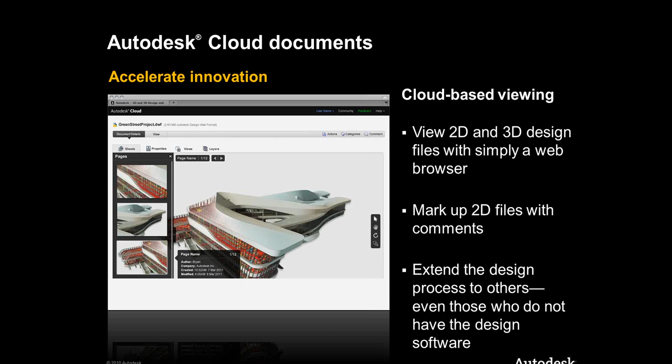While there is not a Revit editor, I can actually upload Revit files, and by doing that I'll have the ability to view the information in them. It does take a little while for it to parse on their side so I can visualize the information, but you can actually look inside the views that were already created in that model.

Now, if you're looking to take advantage of this, the website's right up there: documents.cloud.autodesk.com. That'll give you the main login so you can take a look at that.

Now, I am going to hop into this, but I'm going to hop into it after I go over Buzzsaw.

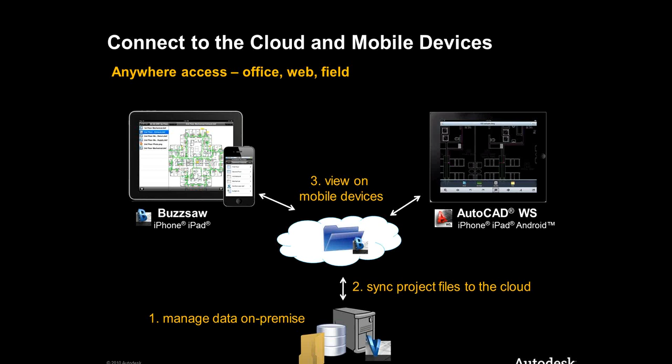So Buzzsaw, again, works for iOS. So if you're running it from the iPad or the iPhone or the iPod, same thing - you can download it for those and run that. And many of the other ones also work for Android. So if you're looking at how you can actually coordinate this, not a problem.

Navisworks can actually aggregate files from Vault. Vault is another program that Autodesk has that helps you synchronize and back up content. Everything you're doing back and forth to Buzzsaw can get pushed out to Vault. And then Navisworks, also Revit - I'm going to show that too - can actually pull that data from Vault so I can get the information I need.

So you're having everybody do their work locally, just like they already are, but I can have things automatically pushing that content to the networks, to the cloud. That way it's accessible by everybody, and it's not the kind of thing where we only update our files once a week and then find out there's been a change four days later. We can actually see what's happening almost automatically.

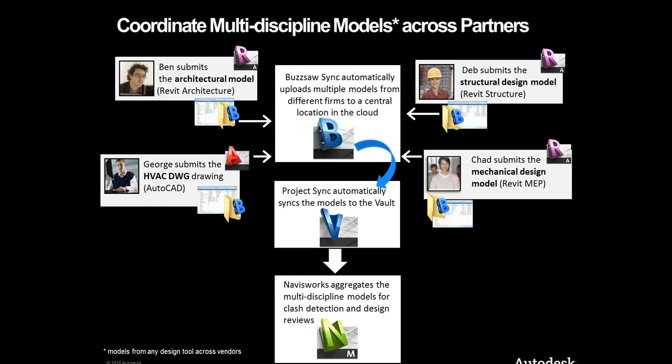So the mobile apps they're pushing - BIM this last year or so has been really, really being pushed mostly by the construction industry. Because of this, Autodesk understands that they need to have access to this software, and more so to the data. They're not always going to be able to walk around carrying a desktop and a monitor or a really beefy laptop. Sometimes all they actually need is some information.

So what they're actually making sure you can do is access all of this data, or at least as much as you can right now, through a smaller tablet - whether it's a Toughbook tablet, so if you drop it off the high-rise it'll still probably survive, or just a simple iPad or Android you can hop on, look at, and explain to your subs what you're trying to show or what's supposed to happen. Many companies, including Skanska, are actually pushing out tablets to their sites, and it helps coordinate and communicate the actual design intent.

So I'm actually going to hop over to the software for a second, to Revit. I'm just in a Revit file that was created in the class. A little cheesy, has a couple of little issues in terms of the roof, but so be it.

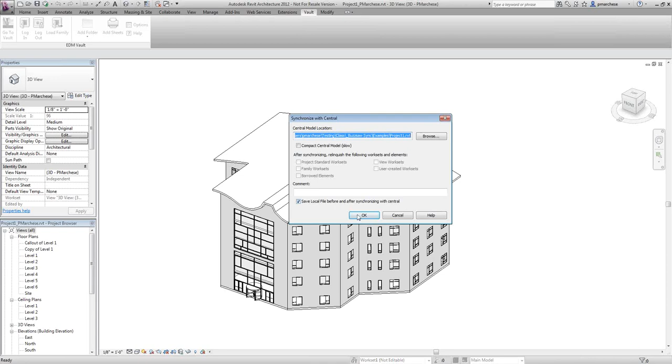Now, inside the Revit file, typically what will happen is you'll save your file locally, and you might get a pop-up depending on what you've got plugged in. I can also save this file to the central, and this will ask me what information is going on with that. Now, if I'm just coordinating with my team locally, no big deal. However, I got this little pop-up in the bottom corner here.

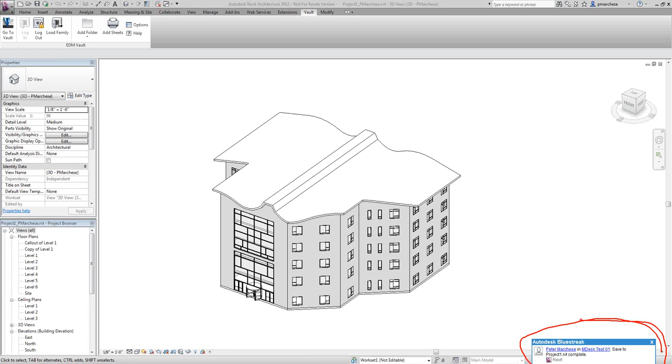That pop-up is a program called Autodesk Bluestreak. I'm going to go into this a little bit more, but that pop-up is basically letting me know, and also letting anyone else on the project team know, that I just saved my work to the network. So things have been changed, things have been updated.

Now, if I want to make sure that my content here is coordinated across everybody on the team, there's a few things that I can actually do. By me saving here, that saves my file to the network. But what I also have is my Autodesk Buzzsaw sync.

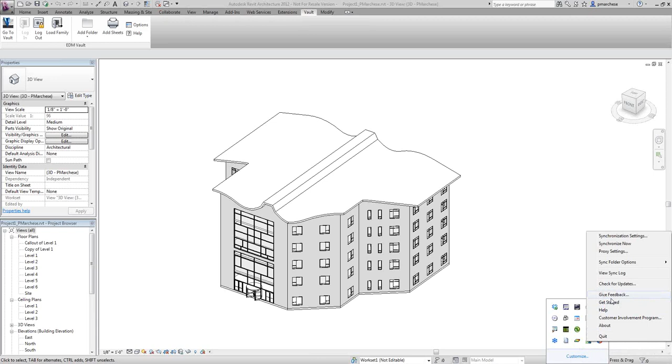What this allows me to do is either say specific folders or files that I want this to be synchronized across the web. I want this to get pushed to the Autodesk Buzzsaw service. And I can tell this to sync on demand, when things are updated, or all the time. So currently, for this project, I have told the folder that it's a part of to be synced manually.

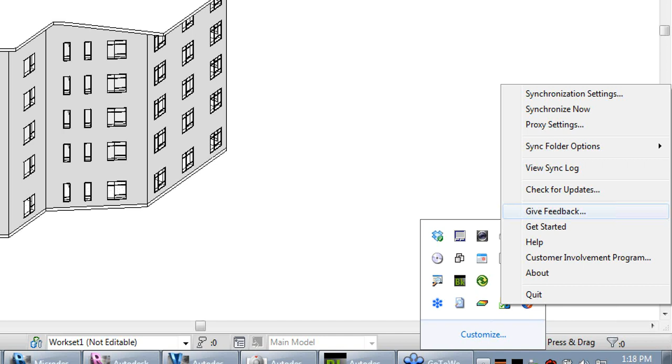And it's really as easy as right-clicking on a folder and saying, set up for Buzzsaw. So if this is something that I really wanted to do, I would just go here and right-click on it. Once that flyout comes out... there we go. Add to Autodesk Buzzsaw sync folder.

So that's really it. It's not like you have to go through a large amount of setup. Once I do that, it just asks me to log in, so it understands which Buzzsaw sync folder you're putting in, tells it where to actually store it, and you're good. And then it'll actually sync the content in there to a network.

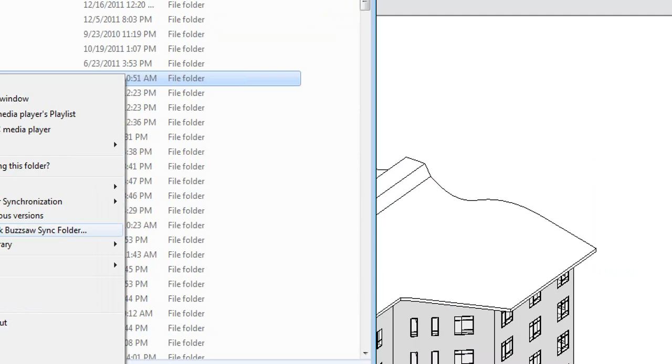There we go. Now, that's the Buzzsaw side of the equation. That's sort of like the cloud storage. Another way for me to do this is to use something up here called Vault. Now, what Vault does is it does tie into Buzzsaw. The two of them sort of work hand in hand for coordinating and also controlling content.

What I have here is an add-on for Revit, and this allows me to log in and either load families from Vault. So let's say you're trying to coordinate 3 offices worth of Revit content. If somebody updates it here, I want it to be updated over there. I want everyone to be working off of the same thing.

What I could actually have is a Vault server running in each of my offices that are collaborating and coordinating with each other. This makes it so that when I actually do load content from my Vault, it's my office standards, and it's the same office standards that are available across all the places.

And I can also say this: I want to add a folder, files or a single file. Similar to the Buzzsaw that I just mentioned, where I right-click and say add this to that, I can add a folder that will be added to and updated to Vault. What that means is that when I go to Vault, it'll automatically say, okay, this is being stored. This is being backed up and archived. In some cases, it's similar to what Newforma does, if you're familiar with that.

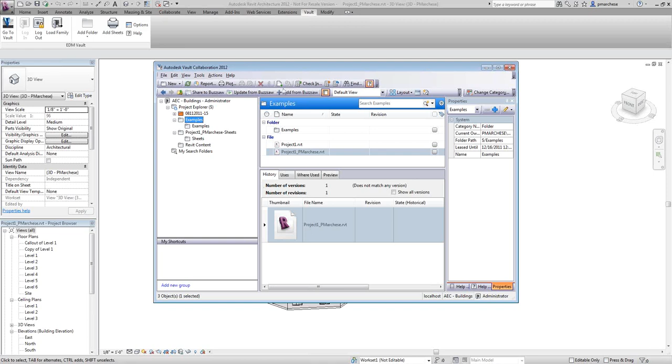If I go out to here, what I'm looking at is my administration console for Buzzsaw. This is the only thing that's really installed locally. This allows me to see what projects I'm working on, so I can manage my projects, see who's actually working on them, what files are in them, and what the actual timeline or actions being placed are. So I can manage a good amount of information here.

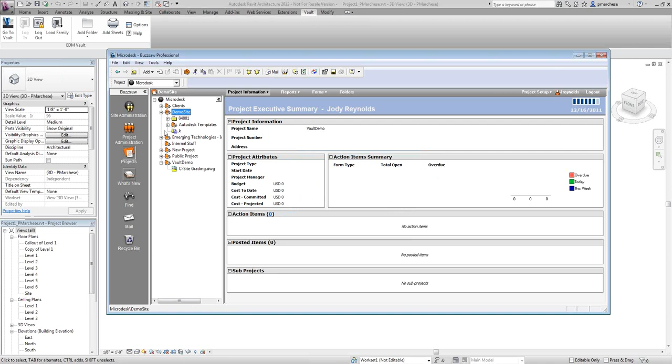So I can see the different folders and the different information going on in there. I can actually see who has access to what. So if I'm an administrator, I can see what's happening with things, and take advantage and understand the permissions and attributes of everything. But this is something I work on locally, because once I've done that, it actually goes out to the web, and then I manage it through this.

Buzzsaw itself is web-based. Vault is something I'll access through the internet, but it's actually something I still have to manage on my own servers. Buzzsaw, I don't.

So this currently is showing me my different projects that I've got on there. It shows me the last modified date, sizes if I ask for it, and the owners. In here I can start looking at the different files, the different projects, and actually see what's happening inside of here.

If I click on one of my files, I can come in here and it'll tell me when it was last updated. I can click on versions and see how many versions of this file I currently have. And this is all cloud-based - anybody with a phone, anything, could log into this and start seeing this data.

And if I want to, I can manually upload this. Or again, what I could always do is just use that Buzzsaw sync tool to do this on my own, so I don't have to tell it to push that out. I'm ready for everyone else to see this.

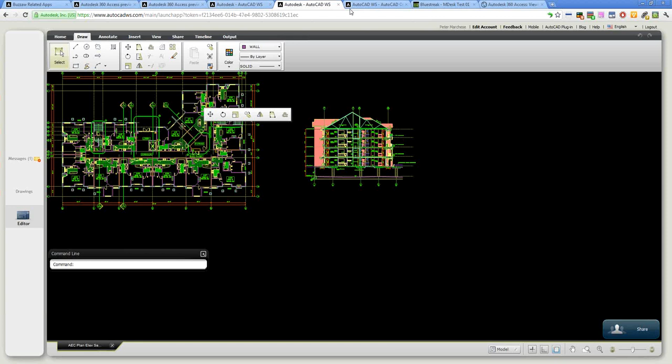But if I'm working with people in multiple offices, and maybe our network or infrastructure does not allow any internet communicators, what Bluestreak does is it's sort of a mixture of a Twitter feed and also a method of communication. Every time I save my file, this actually has an activity feed of it.

So whoever I allowed access to will then have the ability to actually save their content and then say, okay, I've saved this, and just so everybody knows, I gave up control over this. Or just so everybody knows, I fixed this issue or changed this object. So it's a method for me to actually communicate with everyone else on my team what's happening.

So if they need to know what's going on across the network, it doesn't have to be in my office. I could be allowing people from my consultants access to this if we're really trying to collaborate on a project. And the nice thing is, as a project manager, you have control of who gets invited to this feed.

I can't just invite all my friends so I can talk to them or chat with them on this. You only let the people on this that you want on this. And it's a single point of contact as far as an administrator who controls your group activities.

And I can break this out by the project as well. This project has these 10 people, that project has those 15, this one has a little bit of both of them. So that way it's not that these are all the people that are on everything. I can start to piecemeal.

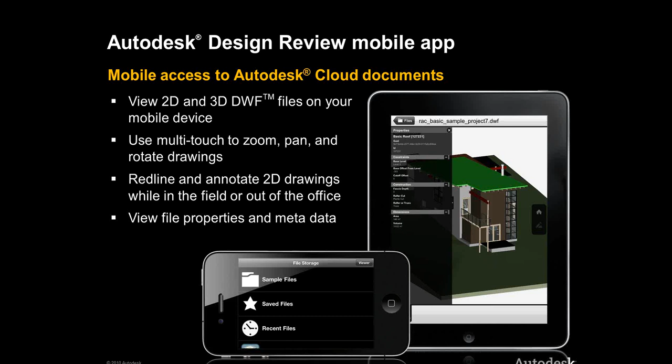And it's all free. So if you go to the App Store for that, you can look for Autodesk and find the software that they've put up there so that their users can get more out of the software they're already working with.

Then the information on AutoCAD WS. So you can modify and manage things on your tablets. It is fully integrated with AutoCAD 2012, but there were those plugins when you go to the website for 2010 and 11. So just because you're not on a new version does not mean you can't take advantage of this.

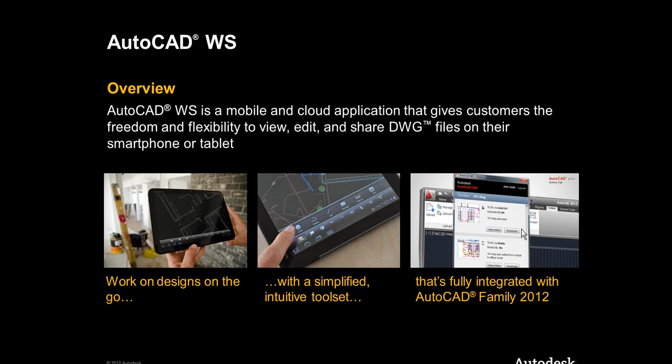And again, all based off the cloud. You're only having to do something once. It's not like I emailed you the file, and then the file that you have and the file that I have are two completely different ones. By placing it in a central location, this time the Internet, all of us are working off of the same content. We're collaborating on things.

We're not saying, well, who has the latest version? Oh, yeah, but you edited the right side, I edited the left side, so now we got to figure out how to put this together. No, we're working on the same file, the same content, and we're actually getting things done faster and more consistently.

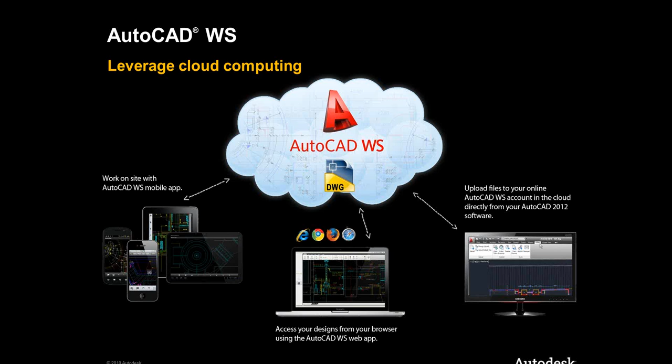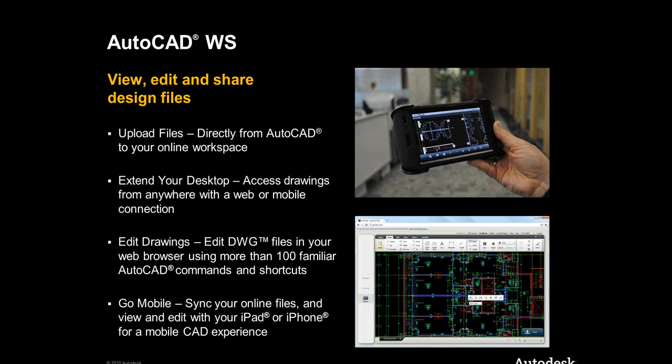So a couple more images on how this works. Again, real-time collaboration. You are working on that file. And if you're on Android, same thing, go to their App Store, you can download it from there. Still free.

Are there any questions from anybody? Yep. Okay, the question we got was, can two users work on the file at the same time?

To a certain degree, yes. It's not like Revit where you have work sharing, and there is no app for that yet for Revit, so that you can actually do that.

The thing I mentioned before with Buzzsaw is you're viewing the previews, so you're looking at views that already existed. In that case, yeah, multiple people can look at that. But for the AutoCAD WS, go back one.

Yep. So when you're looking at this, the real-time collaboration, you are having other people editing at the same time. So it's tracking who's doing what, so that way you don't have two people trying to edit the same line or the same object. That's not to say two people aren't going to draw the same thing at the same time. But it does allow multiple people to be editing it at the same time together.

Okay, great question. Doesn't look like there's any other ones, Peter.